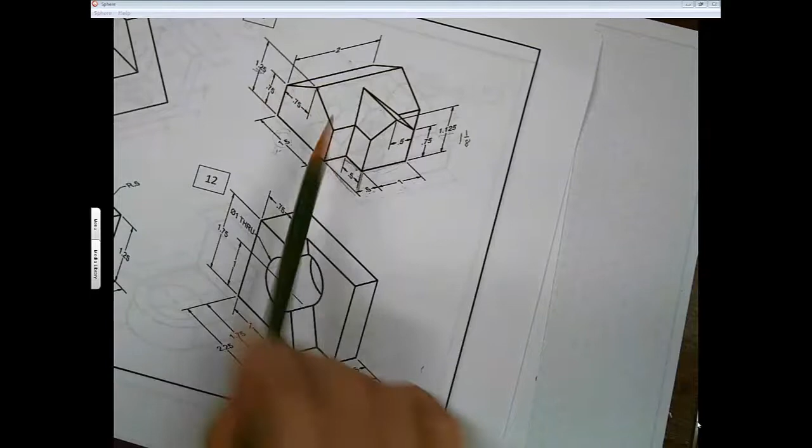Okay, some folks had asked me to do number 10, which is the house. What I'm going to do is I'm going to draw this part that kind of looks like a barn first, and then I'll add on the part where the front door goes.

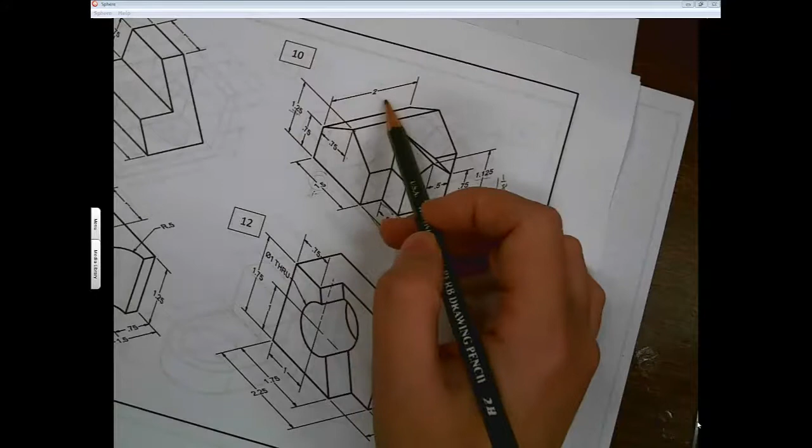Okay, so to start, my overall width is 1.5, my overall height is 1.25, and the depth is going to be 2. I'm going to draw this part first and then just project it back. So I'm going to pick a point on my drawing and then I'm going to go back 6 triangles for 1.5.

Okay. And it tells me that the highest point here, the ridge of the roof, is 0.75 over, and that's where it's 1.25. So from the center of this line, which is going to be 3 triangles, I'm going to go up 5. And I'm going to draw this line really lightly because it's truly a construction line. You guys make sure you draw it lightly. I'm drawing it pretty dark so you can see it on the document camera.

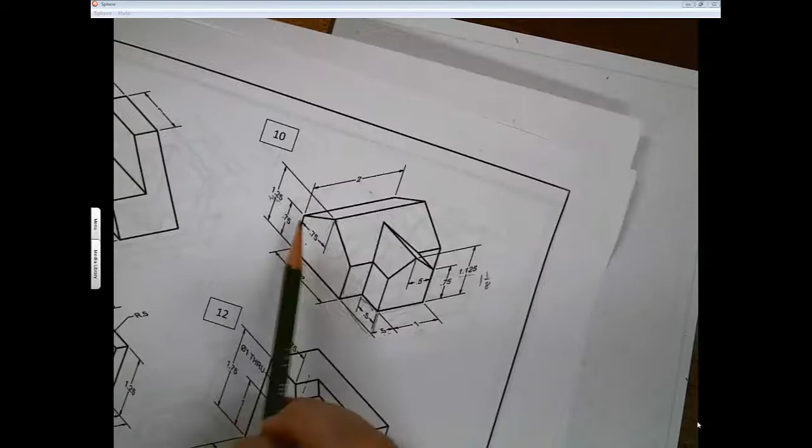The next thing I'm going to do is I'm going to do the sides here. And it tells me that the height here is 0.75. So that's 3 triangles and 3 triangles. And now I'm just going to connect those dots.

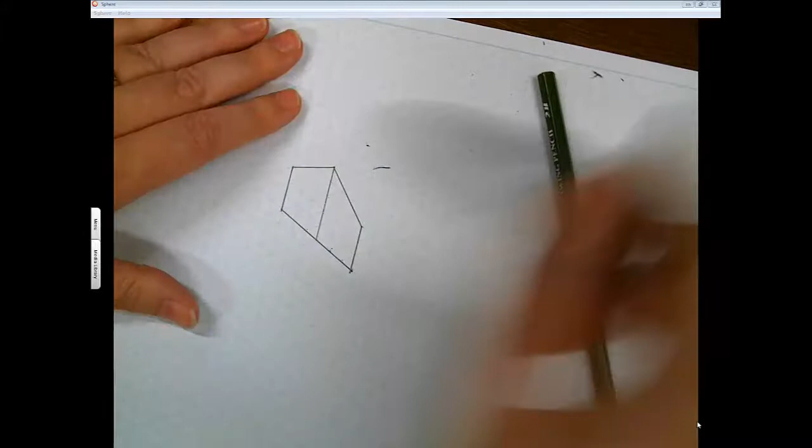These are non-isometric lines. They will not match up on your grid paper, those last 2 there to make the ridge of the roof. I'm going to erase the center, the construction line I used, and now I've got the part that I'm working on.

So now we're going to go back 2 inches. So from here, I'm going to count back 8 triangles, which is 2 inches. 2, 3, 4, 5, 6, 7, 8. I'm going to do the same thing at the ridge of the roof. 2, 3, 4, 5, 6, 7, 8. And the same thing over here. And now I'm going to connect those 2 dots with a line.

When you draw the front one, draw it kind of light, and it will help you later because you're going to erase some of it. And then once again, we just connect the dots with non-isometric lines.

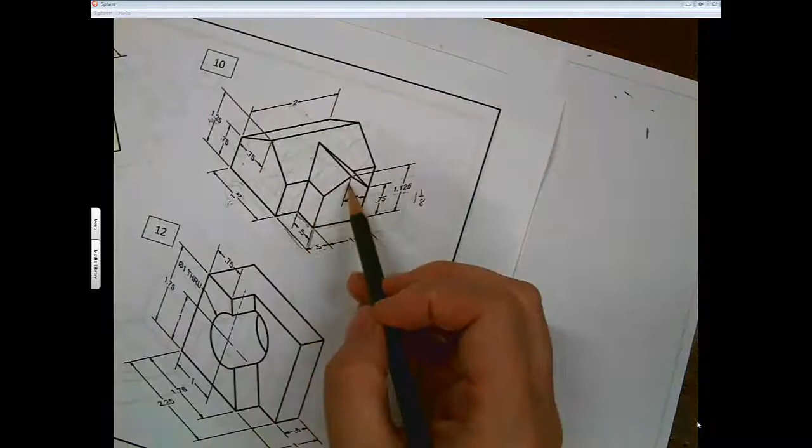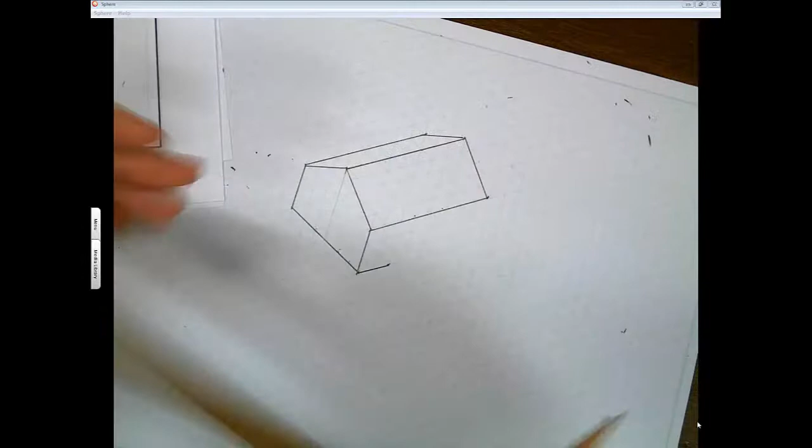Okay. So to do the front, I'm going to start with this piece, this surface. And I know from this corner, I'm going to go in to make this kind of, whoops, off the camera, make this kind of little L shape here. And we're going to connect it to the front of the house. And then come out this 0.5 here. So you're going to have like 2 rectangles kind of facing each other.

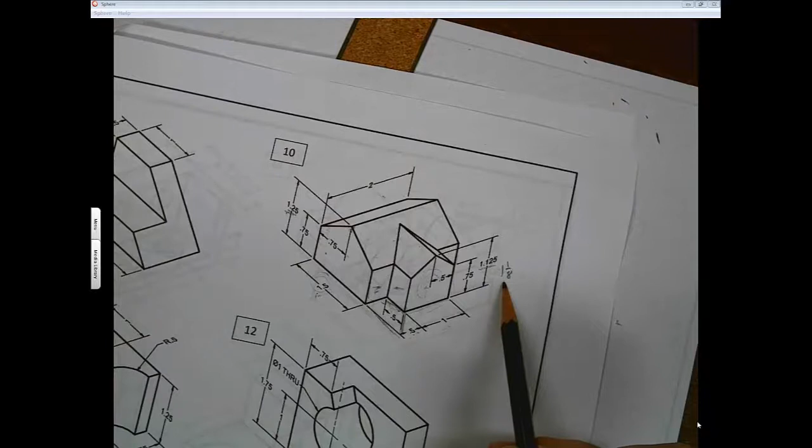Okay, now to get the ridge of this roof, this is the tricky part. This is 1.125, which is 1 1/8. So what I'm going to do is I know that 1 inch is 4 triangles, and 1 1/4 is 5 triangles, and 1 1/8 is somewhere in between. So I'm going to do my best to guesstimate where that point is by picking somewhere in between those 2 triangles. I'm going over 0.5 to get the ridge of the roof.

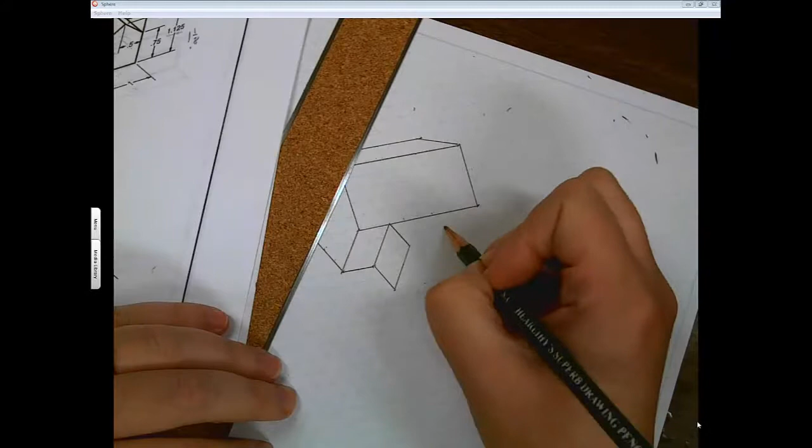So I'm going over 2 and then I'm counting up 4.5. 1, 3, 4.5. The whole front of this piece is 1, so I'm going to go ahead and draw that. Okay, and then back up 3. And now I connect this point to the point I laid out for the ridge of the roof.

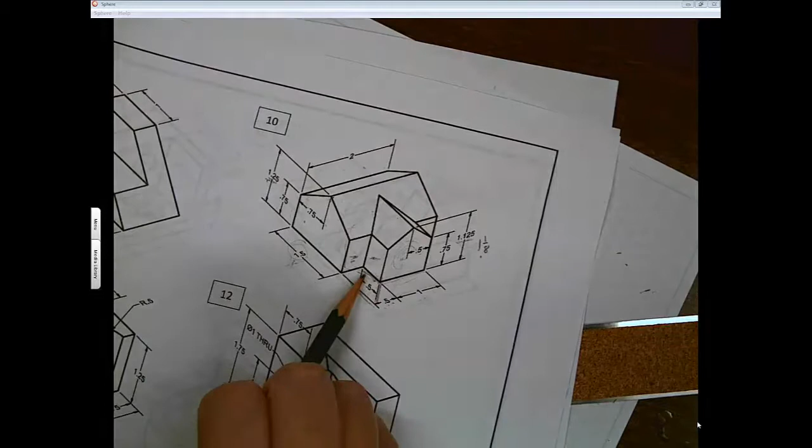And now it's mostly done. We just need this line that goes back. And since this sticks out 0.5, I'm going to count back 2 here, and I'm going to add in another 2, so for 4.

Alright, so I had to edit this video because I kept getting interrupted, so I'm sorry about that, and let's see if we can finish this drawing.

So from this point, I'm going to go back 4 triangles. And I know it's 4, but the drawing you guys have is really missing that dimension, just so you know. And I'm going to connect this point to that point.

And then over here, I'm going to go back 2 triangles from this corner. And then I just connect that point to this corner. Alright, so then just clean it up, erase this line here, you don't need it. Make sure your corners are nice and tight. And there's your little house.